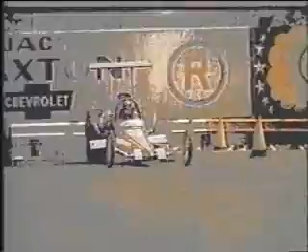Engineers have been on a continuing search for the most efficient and reliable means of power shaft drives and connections.

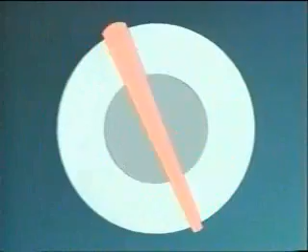One of the first approaches used was a simple pin connection. Although this continues to be a reliable method for certain safety-related or low-cost applications, it was discovered that the pin method was very susceptible to shearing due to concentrated stress forces.

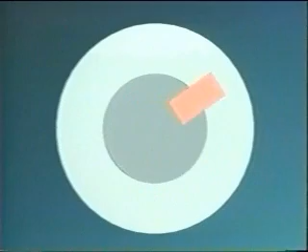Another approach used was the key. This too remains a very useful method, but it also does not reliably hold up to high stress or high torque loads. It was subsequently determined that if the load could be distributed over a greater surface area of the shaft, the connection would be much stronger.

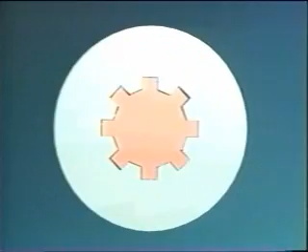At this point, the splined shaft was introduced. Spline shaft connections continue to be useful, but only for relatively light loads. Engineers quickly realized that there are some inherent problems with the spline.

There is a backlash problem. Typically, only 20% of the teeth actually contact, causing the teeth to flex, reducing load capacities and concentrating stress, which in turn caused shearing problems.

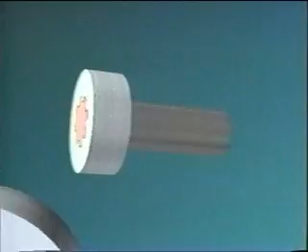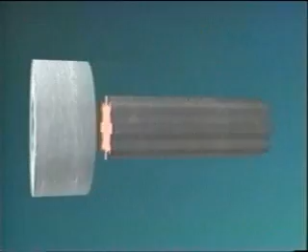These problems are somewhat overcome by increasing the diameter or length of the splined shaft, but this introduces space and weight problems, which can also increase cost. Shaft alignment is also difficult, which often results in machine failure, along with high repair costs and lost production.

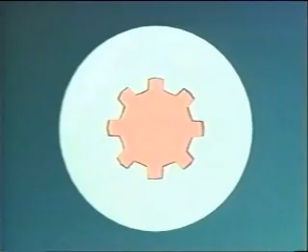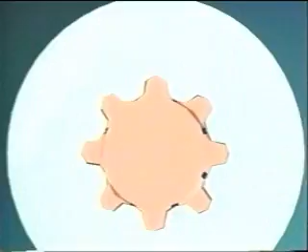The next step was involute splines. Although this new profile increases the contacted surface area, many of the problems with standard splines also plague the involute spline configuration. Surface area contact was greatly increased with the introduction of the serrated shaft.

This design substantially reduces the stress concentrations and increases the contact surface. But it too has load limitations and space, weight, and maintenance problems.

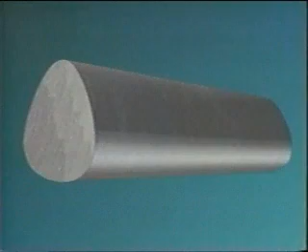The ideal solution is to substantially increase surface contact area and to remove stress concentration points altogether. Such a design would eliminate concentrated stress, backlash, and shearing problems while increasing load capacities. Machines could be designed to be more efficient and much more reliable.

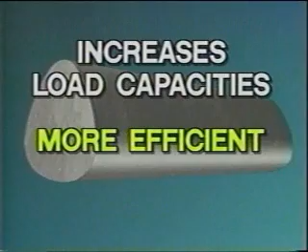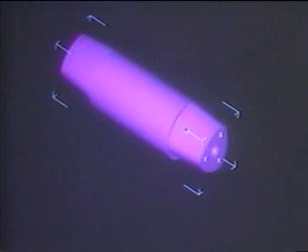General Polygon Systems Incorporated is offering such a system. The General Polygon system is designed to eliminate common failure problems associated with spline and key shaft attachments.

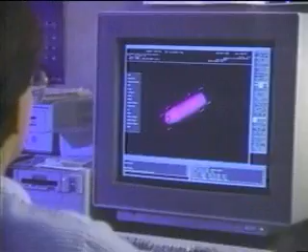The General Polygon system is a proven, superior method for making demanding mechanical connections that are much stronger, much more precise, and have a substantially longer service life.

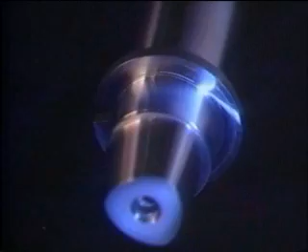The Polygon system allows the shaft to be shortened and the diameter made smaller, resulting in lighter, more compact equipment. It also reduces overall costs, increases load ratings, makes for faster, more simplified assembly, and significantly reduces machine downtime.

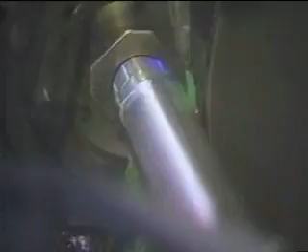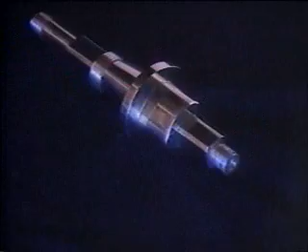The high-precision, highly reproducible profiles of the Polygon system provide connections that have perfect symmetry and concentricity. Polygon connections have twice the shear strength of comparable size splines, resulting in a 35% greater torque capacity.

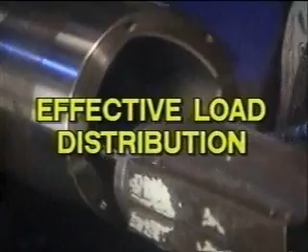Effective load distribution virtually eliminates point contact, minimizing stress fatigue, distortion, and shearing, extending the service life of the coupling. Polygon connections are fully self-centering and self-aligning.

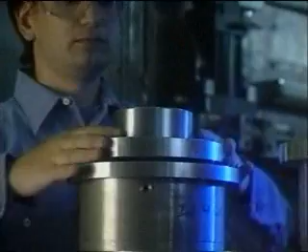The attachment of the component to the shaft can easily be accomplished by simply slipping it into place and applying a snap ring, reducing machine downtime and maintenance costs.

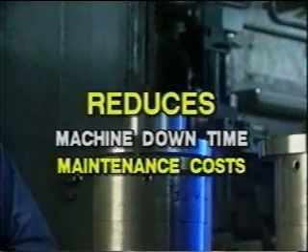Polygon contours also fit better. Interchangeable mating surfaces are finished to high precision tolerances that result in very close fits.

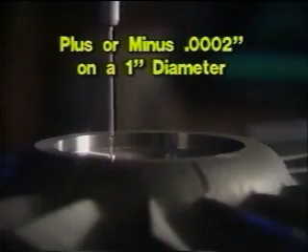Shafts and bores can be ground to plus or minus 2/10,000ths of an inch on a 1-inch diameter and plus or minus 5/10,000ths of an inch on a 5-inch diameter, with a profile accuracy of plus or minus 3/10,000ths of an inch.

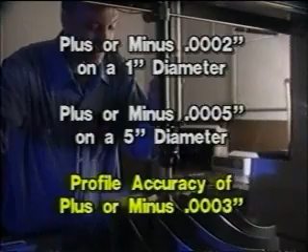The configurations and profiles of the Polygon system expand engineering and design capabilities because of its reduced space and assembly requirements. The high-precision Polygon systems are kinematically produced on Fortuna polygon grinders by General Polygon Systems Incorporated.

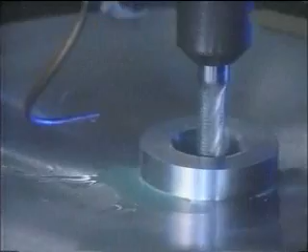General Polygon Systems Incorporated is the largest contract machining service for polygon connections in the world and has the capability to produce quantities from a single prototype to high production runs.

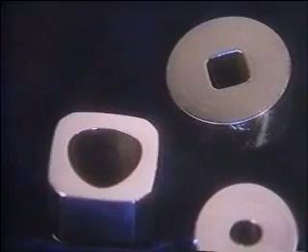Polygon profiles are available through General Polygon Systems Incorporated in standard P3 and P4C profiles, or modified with custom profiles for special application requirements. The P3 profile is ideal for non-sliding connections and tapered connections.

The P4C polygon can be used on either sliding or non-sliding connections.